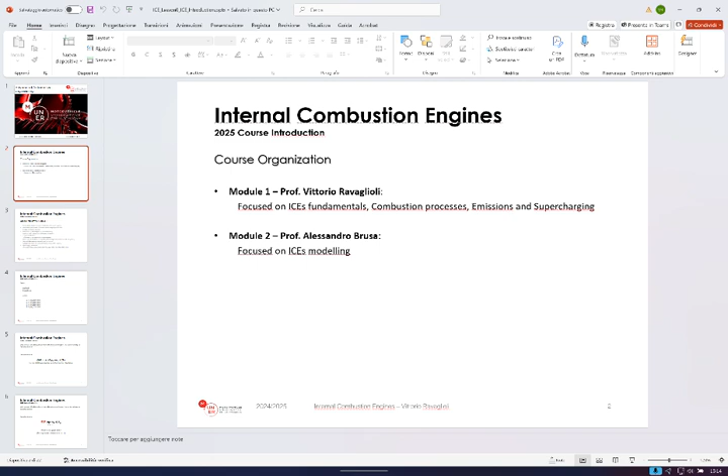of internal combustion engines. If I focus more the attention on module 1, the one we will discuss together, we can have a look at the contents.

As you can see, the content is probably... Sorry. Okay, don't know what's happening, but it doesn't matter.

The content is, let's say, wide. We will focus the attention at the very beginning on base contents.

Maybe for some of you, you will find something which is not brand new, and in some cases you will see that there are some recalls from previous studies you already had in courses you attended during the bachelor degree.

But the introduction is made to be sure that we are all on the very same page, and everyone is perfectly aligned, and we can start discussing more

advanced concepts. Then we will study spark ignited, compression ignited engines. We will study the emissions from engines. We will study abnormal combustions, and we will also, and I think it will be an important part of the

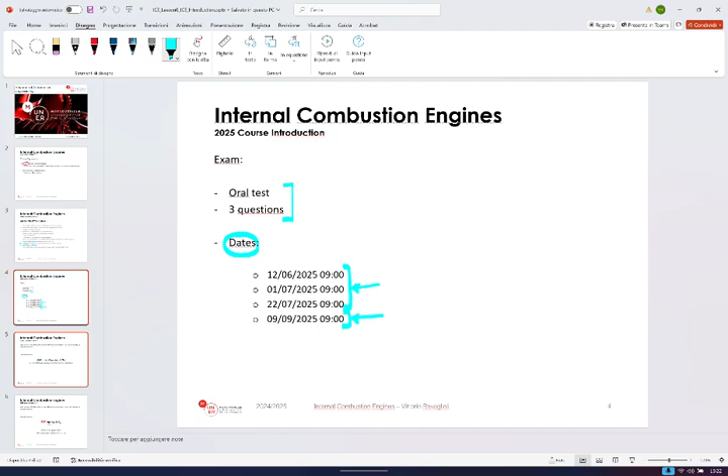You know that we are all focused in this period on decarbonization. So everybody is working to reduce the CO2 we have in the atmosphere, and if possible also to work on the pollutant emissions. We will see that emissions, pollutants, and CO2 are in some cases correlated, in some cases they are not at all. Okay, so we will see that carbon neutrality does not go always in the same direction in which emission limitations go.

But in the past few years, sometimes I had some students which were a bit skeptical at the beginning of the course. So they told me, we really don't know why we should still study engines, because they are a barely alive technology. So maybe we should focus the attention on something different.

And unfortunately today we are online, so it's slightly more difficult to discuss this. But in case you want to say something, I'm more than available for a quick discussion at the beginning of the course before starting this short introduction of the course. If you want to break the ice, we can talk together just a bit. Otherwise, no problem. Okay, no problem.

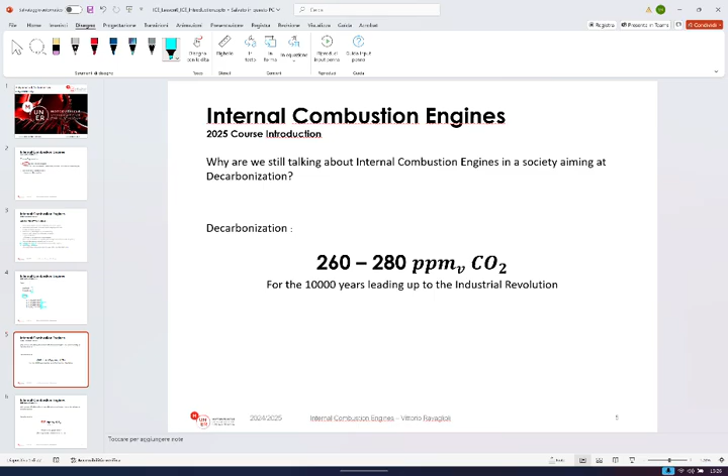So this is more or less the sense of this introduction we are going to start now. We are trying to put engines in the proper perspective that we will have to maintain during the course, to consider the alternatives we have and we will have in the medium and long term as power systems for the automotive field, but also for other power systems in general. Why did I tell you that it's very difficult not to consider sustainability as something which has a strong influence on the development of a technology?

Because this, the one you see here, was the concentration of CO2 we had in the atmosphere immediately before the Industrial Revolution. And according to the measurements we can perform now, it depends on the season, it depends on the place in which you perform the measurement in the atmosphere, but more or less this is the concentration of CO2. This number refers to 2023. As you can imagine, the number now is slightly higher than this one.

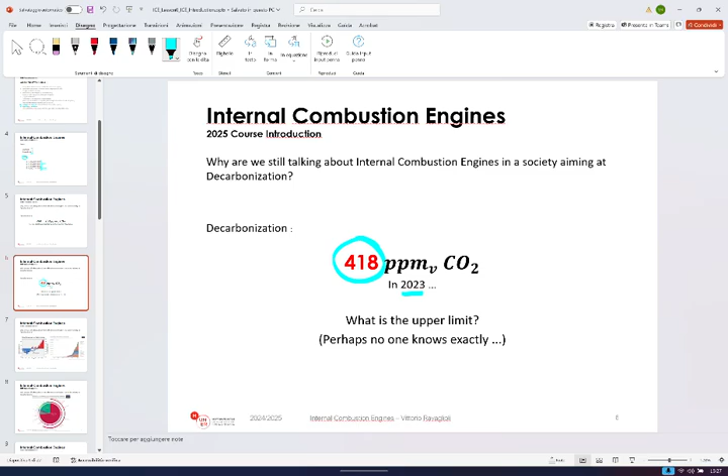Okay. We are seeing that this phenomenon is changing a lot the environment. It is affecting the climate. We see the consequences. We know that there will be effects in the long term, but nobody knows exactly where is the upper limit. Where should we stop this increase? Otherwise, the consequences are no longer manageable. Nobody really knows.

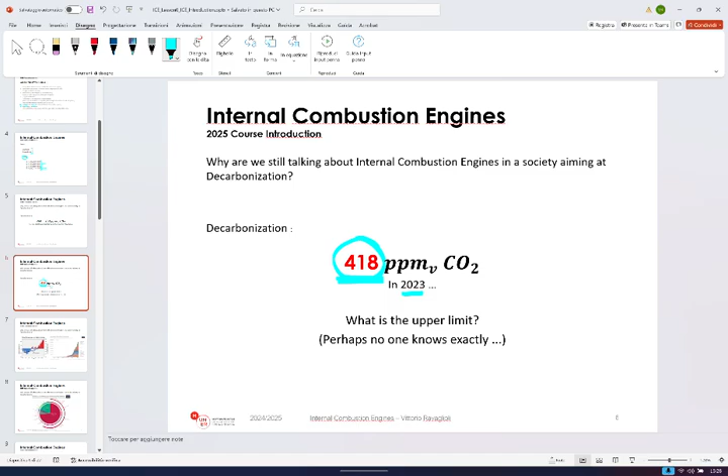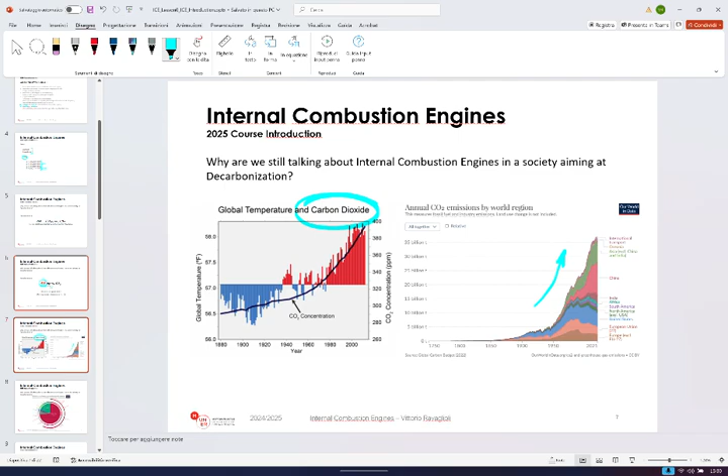Carbon dioxide is not the only reason why the global temperature is increasing. There are lots of greenhouse gases which are considered much less important than carbon dioxide because they are less present in the atmosphere. But the so-called global warming potential of other gases is much more dangerous than the global warming potential of carbon dioxide. We will see that other gases like methane, for example, or N2O are much more harmful compared to carbon dioxide for the global temperature.

What we see also, if we have a look at the right graph, is that some countries or groups of countries started reducing the CO2 production over the years. You can see it, for example, for the European Union, but still they are emitting a lot. Other countries, normally countries which are growing now or which are developing their economy now, are producing much more CO2, and the CO2, for example, produced by China is rocketing over the years.

As you can imagine, it's something that needs to be considered in a global strategy, because it's pretty obvious that we all share the same atmosphere. So the actions one country decides to put into practice need to be, if possible, and normally it's not so easy, coordinated with the actions which are put into practice by other important countries which produce a lot of CO2 as well.

I wanted to ask you a question, just to understand what's your level of knowledge about these topics, and maybe if you are interested and you already read something about these topics. We are in a course now which is focused on the automotive field. So when we speak about automotive, normally we refer to applications which are designed for transportation.

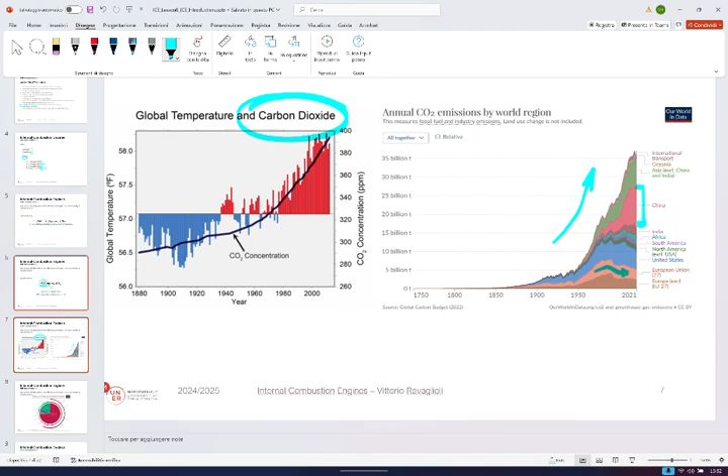So what I ask you is, here we speak about CO2. We normally hear that there is a lot of concern about the emissions from transportation, every day, more or less, but it probably depends on what you do in your life. But very often we hear experts saying that the solution to decarbonize mobility is this one. This is the holy grail which will make mobility carbon neutral. We heard a lot about, for example, how electric cars can save the world, how sustainable fuels can save the world, how hydrogen can save the world, making mobility carbon neutral.

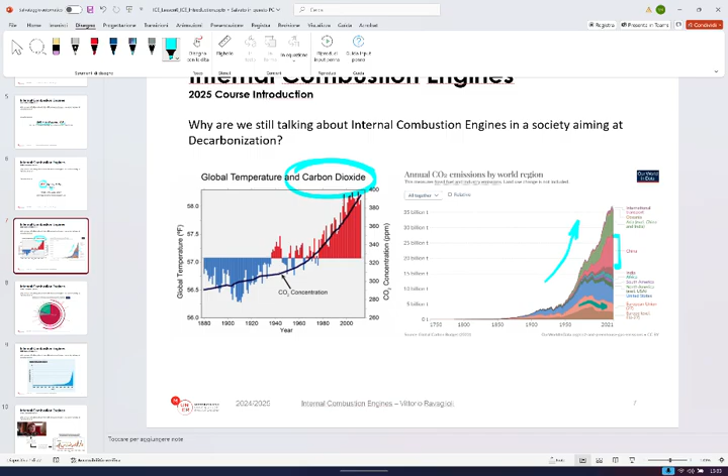It's too early now to judge how meaningful these assumptions are, but I wanted to ask you, there is a lot of concern on mobility, but do you have any idea about the amount of CO2 which is produced by mobility compared to the whole amount of CO2 produced by human activities all around the world? 20-25%. 20-25%, which is not far from reality. Which is a good number. This is not extremely up to date, it's from 2016, but as you can imagine, the picture nowadays is similar.

Here you see the impact in terms of CO2 produced by transportation. And here we put together road transportation, aviation, and shipping. These numbers are nowadays a bit different. For example, shipping is in percentage a bit higher, aviation as well. The total portion for transportation is a bit higher than 16.2%, but in general, I think that this picture clarifies that if we concentrate only on road transportation, aviation and shipping, and we forget about all the rest, for example, energy used in buildings, industry, and agriculture, we are in big trouble anyway.

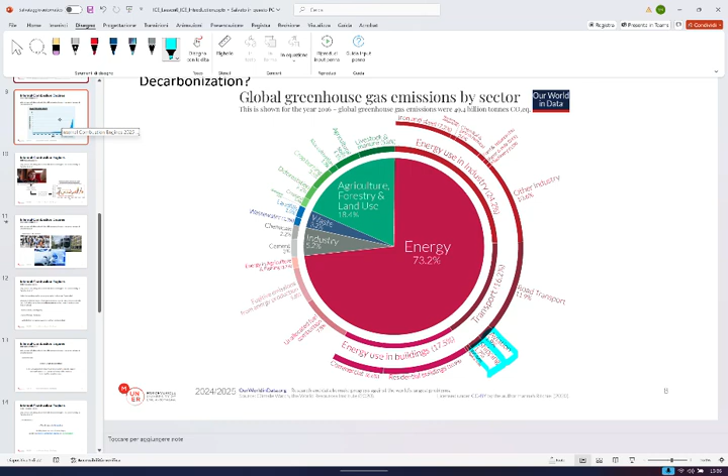The main reason why we continue to emit more and more CO2 is quite simple, and it is strongly related to the growth of population. Of course, this rapid growth of population from the Industrial Revolution means that the Industrial Revolution and the developments we had later on led to wealth, and this is something which, I think, is pretty clear and straightforward.

But this growth is becoming critical because we are changing the climate, and the climate is producing lots of heat waves worldwide, extreme weather phenomena. And what we see is that, in order to make it more practical, what's happening?

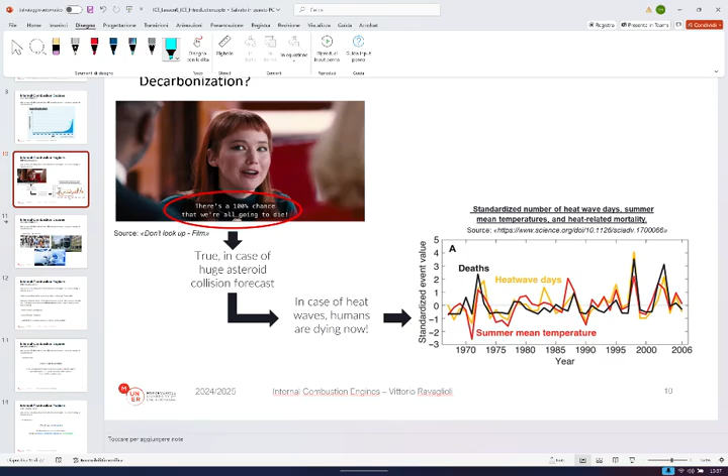Well, in the long term, sorry, in this slide I was a bit kidding. Probably you've seen the movie Don't Look Up. What's going to happen? Of course, in the long term, we are all going to die.

But what's happening now? Now what we see is that the heat waves we have over the years always correspond to a higher number of deaths, which are directly correlated. So if we do not take into consideration these phenomena, and we neglect the fact that we are experiencing extreme weather events and extremely high temperatures, these phenomena kill people.

So taking into consideration these problems and finding solutions in the long term which can mitigate these phenomena could be really beneficial for humanity. So in this sense, I think that we can, as engineers, feel the responsibility of doing something in this direction. The problem is that many times we say that we feel this responsibility, but many of us have different opinions about what proper solutions leading to beneficial results can be put into practice.

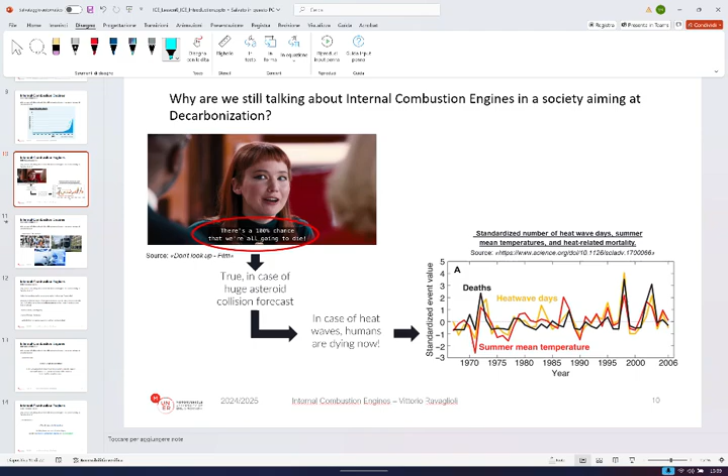Normally, when we speak about solutions, we hear people saying that we should all walk, we should use public transportation, or other people tend to say that using EVs can be the best way to mitigate the emissions, at least from mobility. Okay. I don't know what's your point of view. It's not necessary to discuss it now.

On these first two solutions, let's say 1, 2. No. The highlighter is not fantastic, so this is 1, this is 2, and this is 3. 1 and 2, I have nothing to say. They are really sustainable options. If we walk or if we share the transportation systems with other people, we can reduce a lot our impact related to mobility. With this, I would say that it depends. It can be more sustainable or not. We will have to discuss it later on.

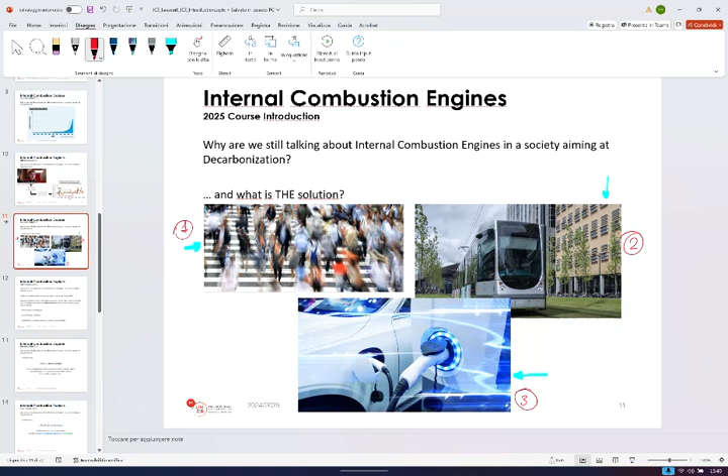But if we look at the technologies which are not related to walking or using public transportation, here I wanted to start introducing some major technologies we have for mobility. When we use a car, we are studying automotive engineering, so when we move a vehicle, we normally have 3 options in the short and long term. The option is to power the system with the internal combustion engine, or if we have an electric vehicle, we can use one electric motor, of course, plus the batteries, which store the energy, which are probably the most critical player in this framework. And then we have the so-called fuel cells.

In this case, the propulsion system is still an electric motor, but the energy is stored in a fuel, which in most of the cases is hydrogen, especially for the most conventional fuel cells which are produced now, which are the PEM fuel cells. And basically they feed an electric motor generating electricity, converting a fuel, as I said, normally hydrogen, into electricity. So these are the three options we have available for mobility in automotive vehicles.

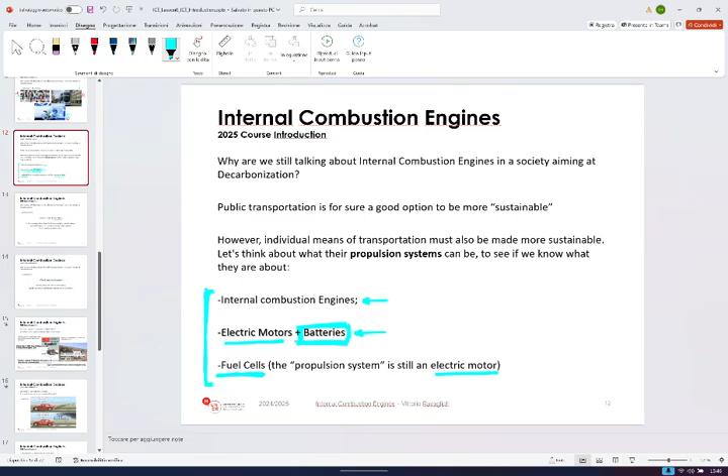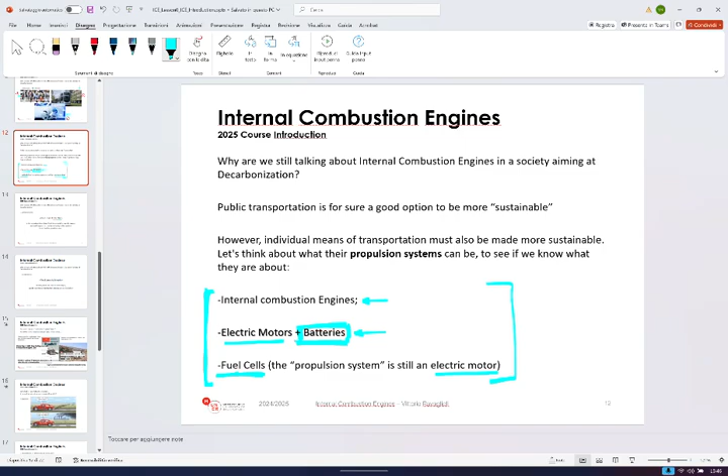In some cases, we tend to think that the future is fully electric, and some say that electric cars will be the future of mobility. I have to say that in the long term, it is difficult to see what's going to happen. We really don't know what's going to happen in the future, because the technologies we were mentioning before, these three, are developing a lot, and they are becoming more and more efficient over the years. So maybe the comparisons we are performing now will lead to completely different conclusions in, I don't know, 20, 30 years. But at the moment, the short-term future struggles to be fully electric for several reasons.

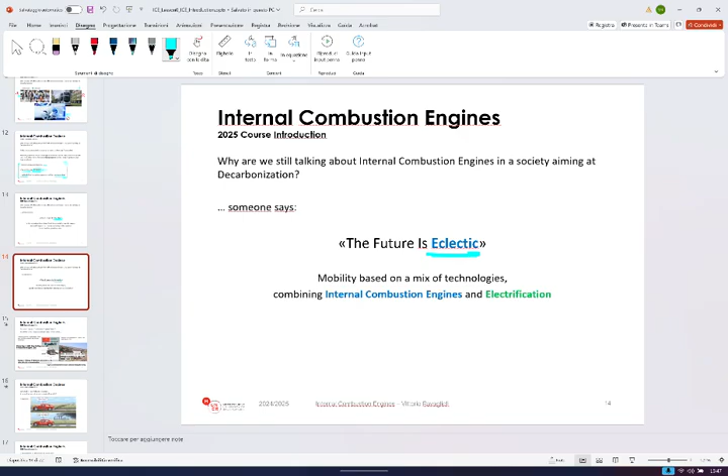So some experts in this field are starting to say that probably the future will be eclectic, not electric. Eclectic in the sense that mobility will be probably based on a mix of technologies, which will combine in the vehicles of the future internal combustion engines and electrification.

Unfortunately, again, I cannot see your faces today. Maybe some of you are skeptical, but again, we will see it. I'm going to conclude this introduction with some examples.

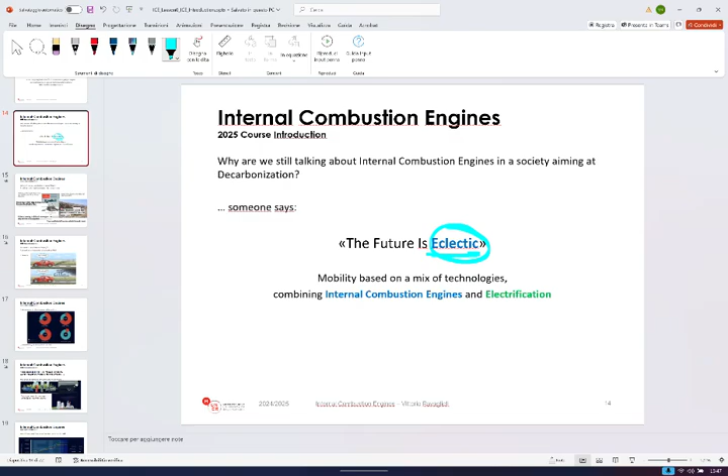And we also know that in 2035, theoretically, it will be no longer possible to produce cars which are equipped with internal combustion engines fed with fossil fuels in the European Union. We will see what's going to happen. But the point is, engines are still here, and there are some technical reasons we will see during the course, and which I think, when we will do some energy balances, will convince us. And these technical reasons are not related to conspiracy or any other theory which some people tend to use or mention sometimes.

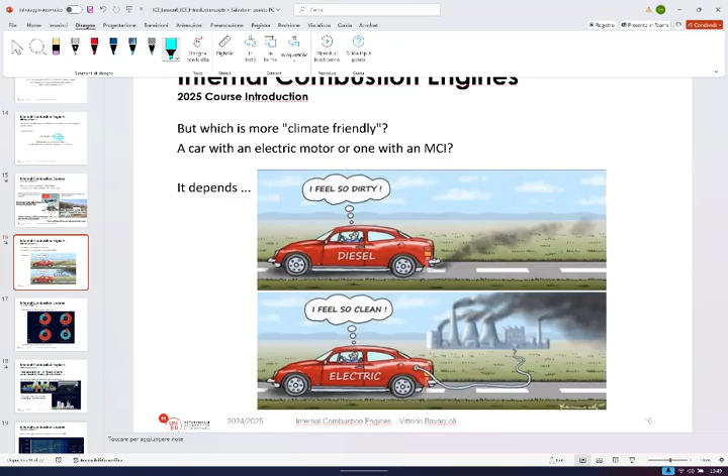So who's more climate friendly? A car with an electric motor or one with an internal combustion engine? Again, it depends. Of course, this picture might look a bit stupid, but it's a joke, which basically wants to focus attention on the fact that diesel cars, for example, are considered evil at the moment for several reasons. Some of these reasons are perfectly meaningful. For example, the Dieselgate is one of the reasons which shed a lot of bad light on internal combustion engines. And of course, these cars are considered high polluting cars.

Normally, we consider electric cars extremely clean. So we consider EVs, electric vehicles, as totally clean because they do not produce any pollutant from the tailpipe. What's the problem? The problem is that the real impact of electric cars depends on the way in which we produce the energy which is introduced in the car. And for this reason, I read a book by an engineer who was asking, you know what EV means? It's electric vehicle.

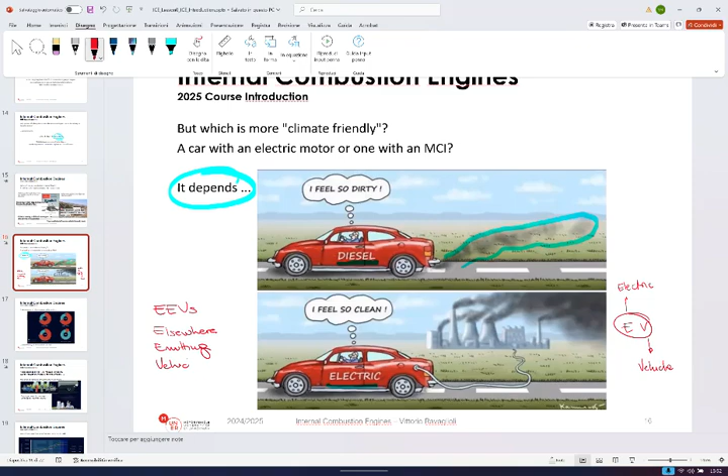I read a book about an engineer who tended to name EVs as EEVs, which in his perspective was the acronym of Elsewhere Emitting Vehicles. Because honestly, they really produce emissions normally, but they produce emissions somewhere else compared to where they are used.

Of course, it is pretty obvious, the amount of emissions they produce depends on the way in which the electric energy is produced. If the energy is produced using renewable sources, of course the impact of these technologies is very low. If the energy is produced from burning fossil fuels, as you can imagine, the impact becomes extremely high, because even though they are normally efficient, the process which is behind the production of electricity is not that efficient. So overall their impact increases a lot, but it depends on the energy grid in which these vehicles are charged.

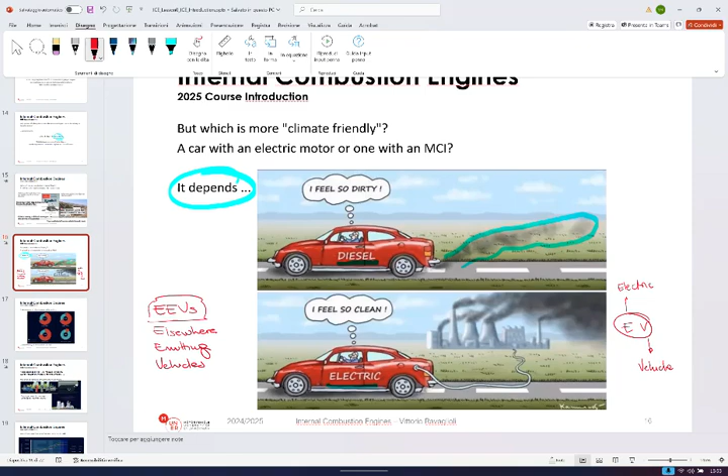Of course, it depends also on the country. Here are some examples. It depends on the season of the year. Probably you know that in Italy, at least during the summer, 60 point something percent of the electricity we produce during the summer is renewable, and of course during the winter it is much lower. So the season of the year in which we use each specific technology is very important to quantify the real impact of that technology.

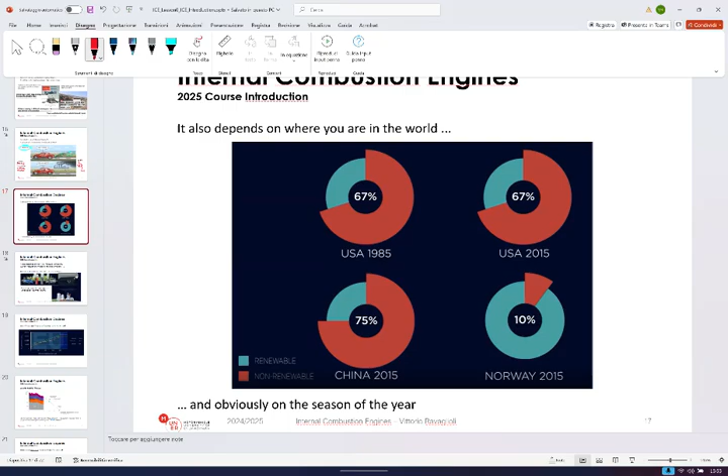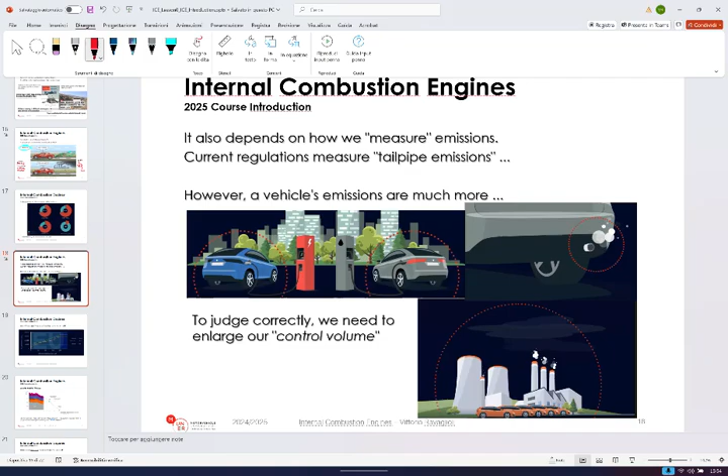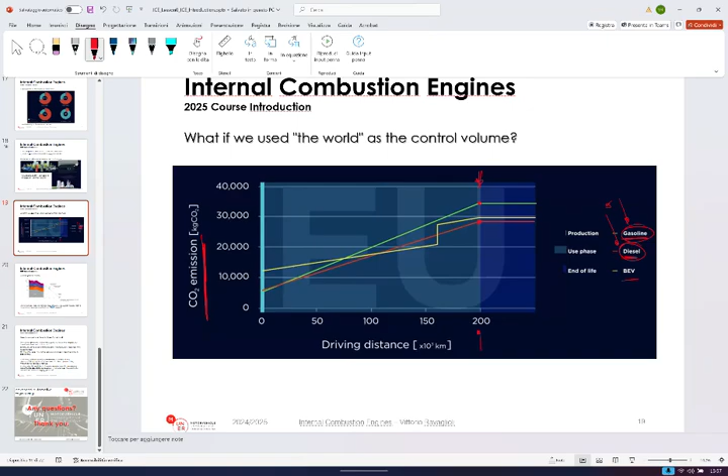When we move from spark ignited to compression ignited engines, we gain efficiency, so we reduce CO2 emissions. But what was extremely surprising for me at the very beginning when I read this paper is that electric vehicles started their life with an amount of CO2 associated with the vehicle itself which was much higher compared to the starting point of cars equipped with internal combustion engines. The main reason why this line was starting at this point was simply one thing: the battery.

Producing a battery for a battery electric vehicle is extremely energy consuming. So the extra CO2 associated with the production of the vehicle is similar to the emission increase you have in a diesel vehicle after running the car for approximately 50,000 kilometers, which was at the beginning for me quite surprising. Then you start from this point, and if you consider the average energy grid we have in Europe, you see that the rate of increase of this line is actually lower. So if you recharge the vehicle, you produce less emissions, but the main weakness is the production of the battery.

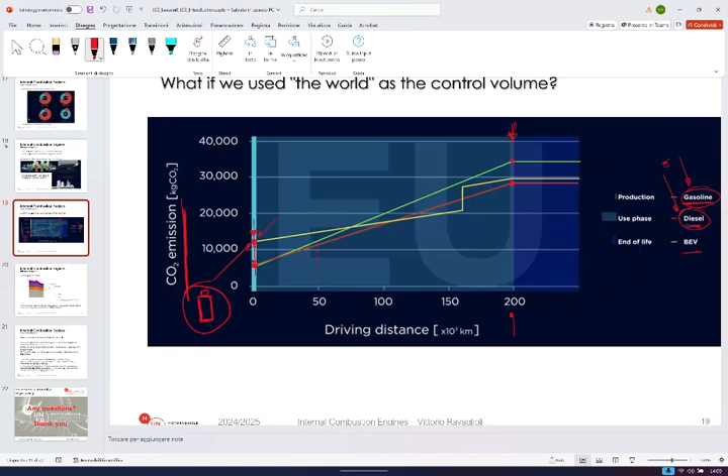Anyway, we have some alternatives, we have some technologies available, we are developing these technologies, and we have some goals. Which goals do we have? Probably most of you are aware.

Sorry, just for curiosity. Yes. The step that was in the... Sorry, I have the audio coming from two sources. Okay, repeat please. Sorry, that was my mistake.

In the previous slide, we had a step after, I think, 150. This one. I think this no longer exists, because in this case the battery was replaced with another battery, because as you can see, this extra increase is the same you have here, and the reason was that after 150,000 kilometers or slightly more, the capacity of the battery was low enough to require replacing the battery.

Now I have to say that battery technologies have improved a lot, and normally in a battery electric vehicle the battery is guaranteed for approximately roughly 190,000 kilometers, which means that after 190,000 kilometers the battery capacity is higher than 70% of the initial battery capacity. So probably this number should be here, this replacement should be here instead of here, but the physical meaning of this step is the one I was mentioning before. I don't know if I answered.

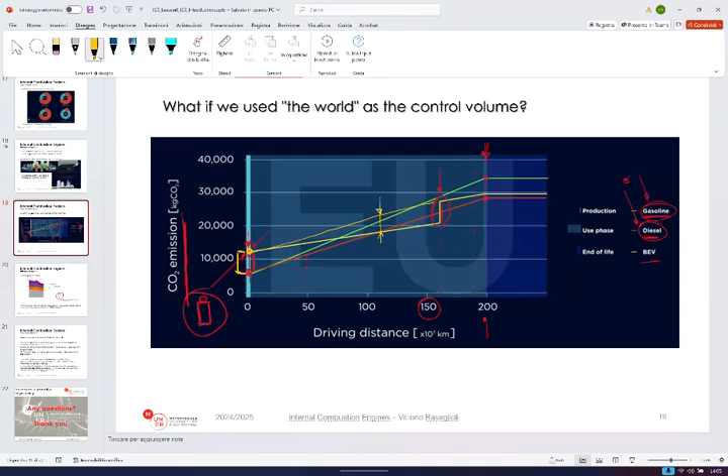With regard to the automotive field and transportation, probably you know that we have to be carbon neutral from 2035 onward, which means that in the European Union, according to current regulations, in 2035 only carbon neutral vehicles will be sold.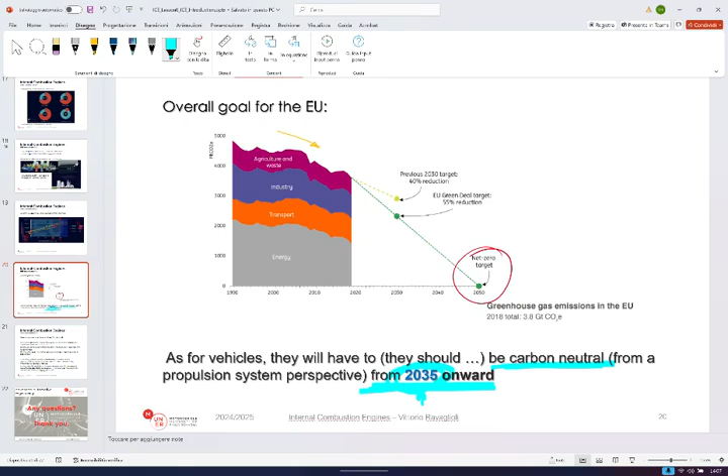Of course, non-carbon neutral vehicles will still be used because they will already be on the market, but from 2035 only carbon neutral vehicles will be produced, which means a carbon neutral vehicle is a vehicle which does not produce any CO2 emission when it is used.

So it means that if you burn a fossil fuel, you burn a hydrocarbon. Again, we will see it, but probably you know that current vehicles burn hydrocarbons. When you have this molecule of a hydrocarbon, you have carbon and hydrogen. When you burn this, of course, you produce CO2 and water. We will see the reactions, no problem.

But now it's just to focus attention on this: when you burn a hydrocarbon, of course, you produce CO2. If the hydrocarbon comes from a fossil source, nature took millions of years to produce it, and now we burn it and produce a lot of CO2 in the atmosphere. So this process cannot be sustainable. We increase the CO2 concentration in the atmosphere, so according to current regulations, from 2035 onward these vehicles will no longer be acceptable. So which alternatives do we have?

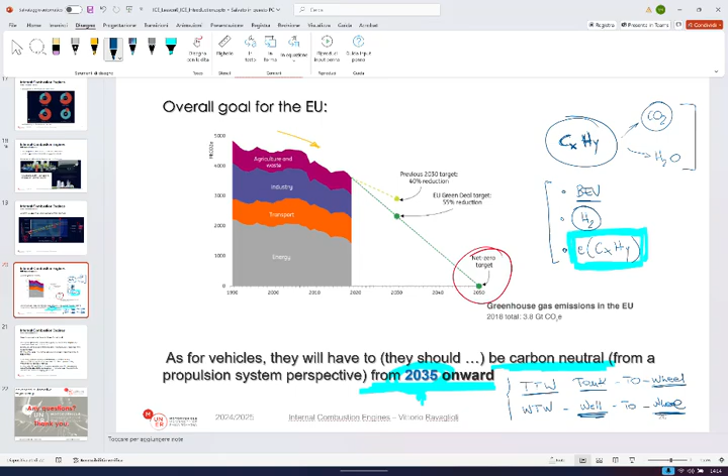Fair emission regulations should be the so-called well-to-wheel — so from where we take the energy to where we use the energy. Now lots of regulations are under development, but at the moment we are stuck in an intermediate situation. But the question was super correct, because the last thing I wanted to analyze with you is this consideration.

How do we measure the emissions of a vehicle? This is a key problem related to the question I just received. The obvious place to look is the tailpipe, and when I say obvious, I mean that current emission regulations look at the tailpipe. But there's much more to it than that.

Before you drive a car, it must be built, and to build it, resources must be extracted. On the other side, which is an even more complicated aspect, what happens when the vehicle reaches its end of life? I mentioned before that it's very difficult to go backwards and, for example, quantify the CO2 emissions associated with the production of batteries.

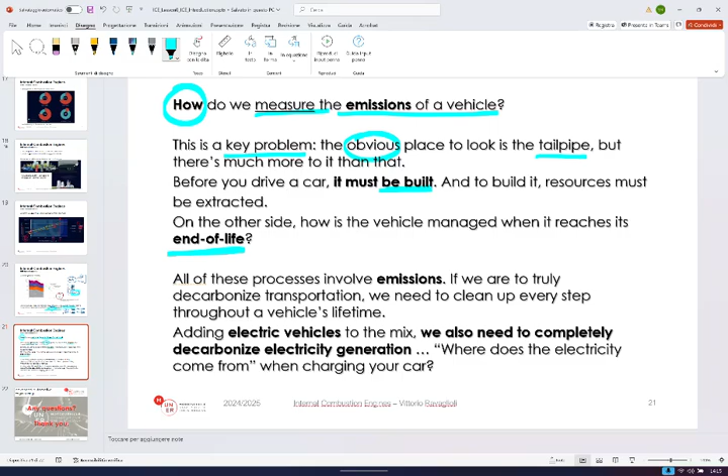But quantifying the emissions associated with recycling old batteries is even more complicated, because now we are at a stage where we are using electric vehicles produced in the past few years, but we are not yet completely aware of how we will be able to manage all these batteries when they reach their end of life.

So adding electric vehicles to the mix, which is a reasonably recent problem, we also need to completely decarbonize electricity generation.

So if we want to properly quantify the emissions, and we really want to decarbonize transportation, which is the goal we really have — because it is necessary due to several reasons we see every day in how air quality and climate are changing — we really have to do it with a fair approach, which does not favor one specific technology over another. I'm not in favor of one compared to the other, but I think that as engineers we really have to be fair in these considerations.

So when we look at conventional engines, we have to say, okay, it's rubbish because in most cases it uses fuels which come from fossil sources, and they have a reasonably low efficiency.

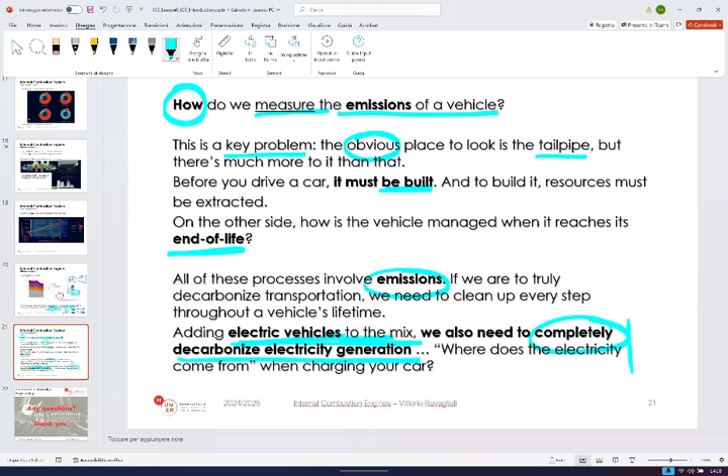Okay, this was just an introduction, and I really wanted to do it together to start collecting some useful consideration information, which are, in my opinion, necessary to look at engines in a different way. We will sometimes recall this consideration, and also we will go more into the details during the course.

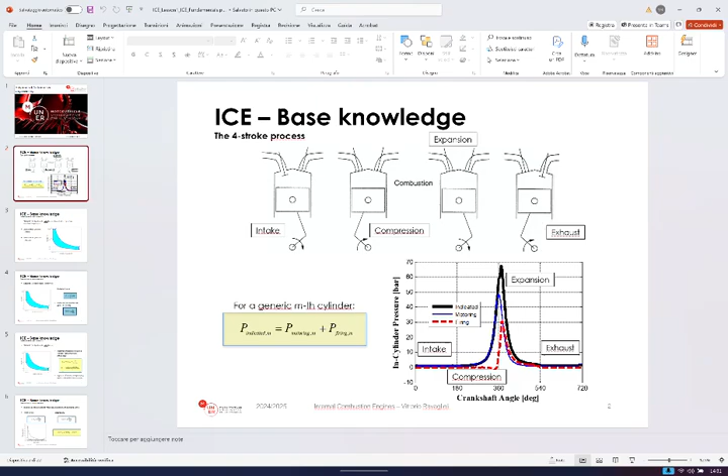Okay, let's start from the very basic concepts of internal combustion engines. During the course, we will study internal combustion engines which are characterized by the presence or implementation of the so-called four-stroke process. So we will have engines which are, in most cases, characterized by a cycle that can be divided into 4 consecutive strokes.

Again, probably some of these concepts are very well known to you, but in case you have any doubt, please stop me and feel free to ask.

The first stroke is the intake stroke, where we introduce the air inside the cylinder. As you can see here, there is an intake valve which is open, and in this stroke the fresh air enters the cylinder. The piston moves from the top to the bottom dead center, rotating the crank slider mechanism around the crankshaft.

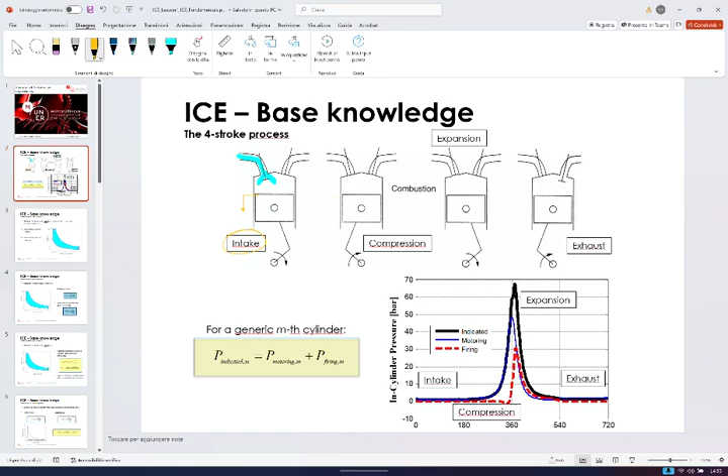Then the piston reaches the bottom dead center, and during the compression stroke the piston goes up and moves from the bottom to the top dead center. As a result of this movement, in the first stroke, which goes from approximately 0 to 180 degrees, the pressure inside the cylinder remains low, close to atmospheric pressure.

The valve is open. Then, approximately at 180 degrees, you close the intake valve, and with the valves closed, you move the piston up and increase the pressure inside the cylinder. So the piston approaches the top dead center, and at a point close to the top dead center, you have the so-called start of combustion.

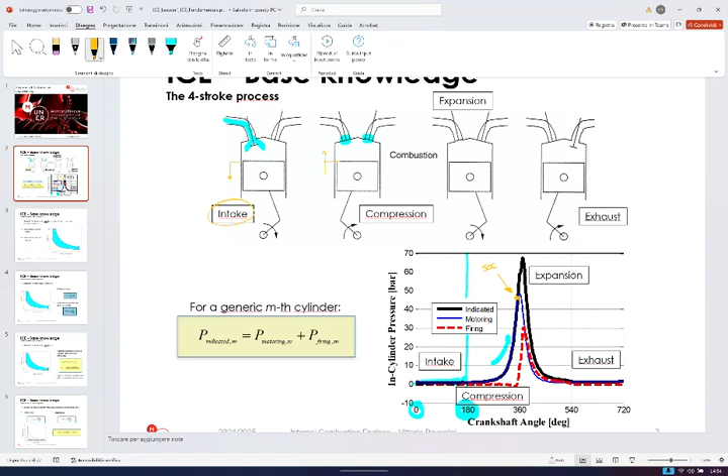So if the charge within the cylinder did not burn, or if it were not ignited, we would have in the cylinder the blue trace pressure. So we would have the intake, compression and expansion, and in this case the engine would behave more or less as a volumetric pump.

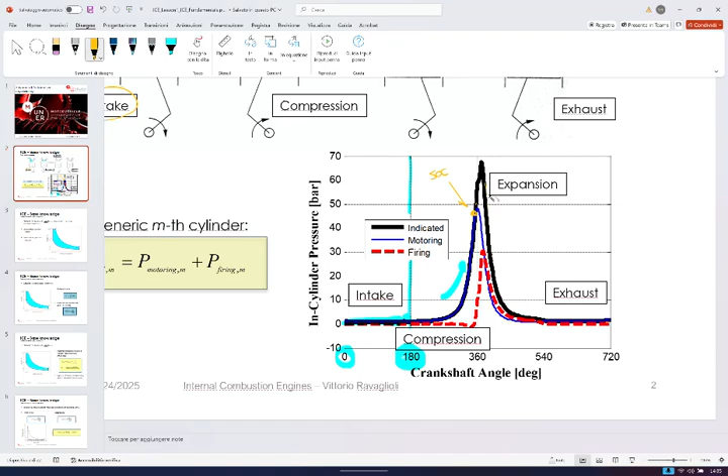Here what you see is that in the real world we have an extra pressure increase, the red trace added to the blue one, which leads to the instantaneous pressure within the cylinder, because the compression-expansion blue trace is increased by the fact that within the cylinder we have a charge which also contains a fuel that is ignited, and the extra pressure generated pushes the piston down from the top dead center to the bottom dead center.

During this stroke, we really collect energy, work. Then when we approach the bottom dead center, we open the exhaust valve, and then the exhaust gases leave the cylinder and go to the exhaust line and leave the engine.

Of course, they do not immediately leave the engine because, as you know, there are some post-processing tools, like for example the after-treatment systems, which have to process the exhaust gases in order to minimize the emissions released into the atmosphere.

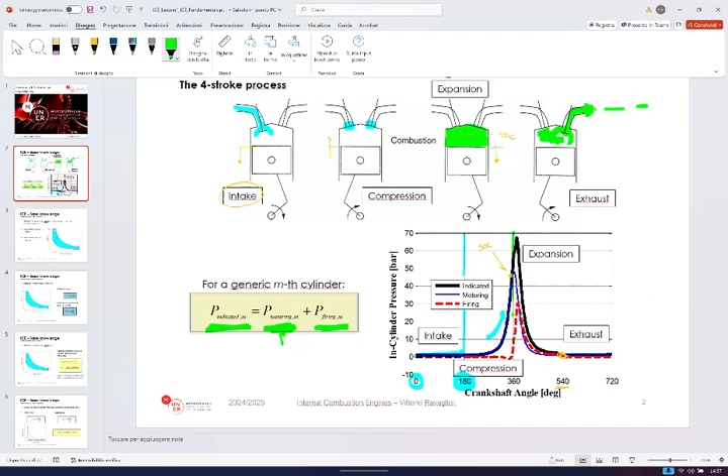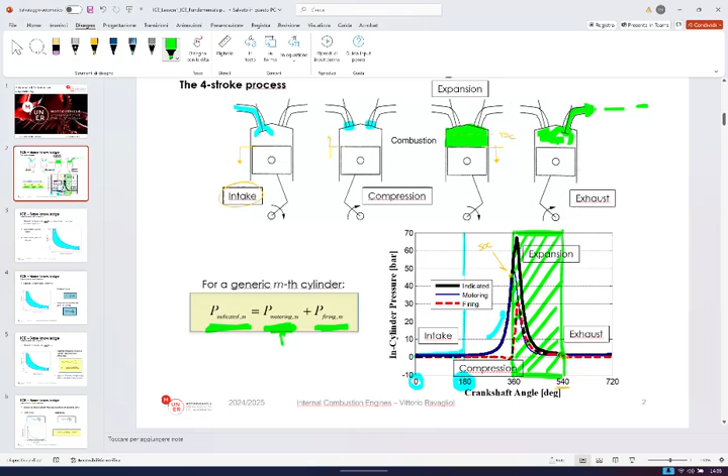So to see it in another way, we have 4 strokes, but the only one in which we really collect power is this one. Or at least the only one in which we collect a significant amount of power. So this is the process. How do we study the process from a thermodynamic point of view?

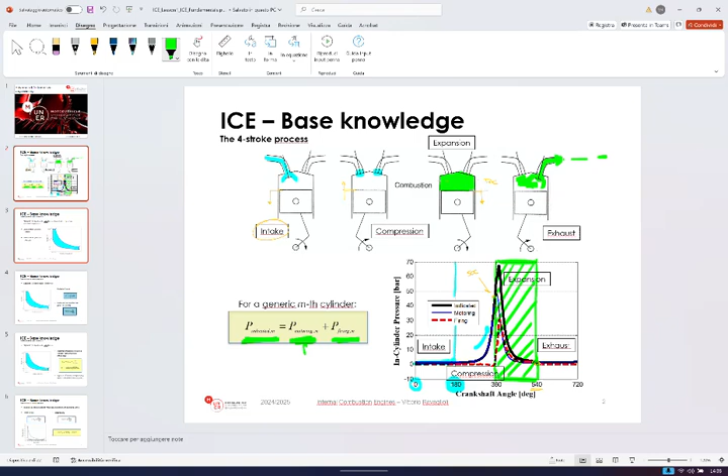Well, we have different ways. The most typical and easy way is to use an ideal cycle or start from an ideal cycle. Normally the Sabathé cycle is the most common way we have to study the efficiency of an internal combustion engine, and it is an ideal cycle which combines two simpler ideal cycles, which are the Otto cycle and the diesel cycle.

The Otto cycle is an ideal cycle in which we have one ideal compression which goes from 1 to 2, and then we have an ideal combustion. I don't remember what I said. The Otto cycle, let's start from this. We have this ideal compression, and then we have a combustion which takes place at constant volume.

While the diesel cycle is similar, but the combustion process takes place at constant pressure. Then in both cases we have an ideal expansion, which is the one that in this case goes from 4 to 5. The Sabathé cycle puts together the characteristics of these two ideal cycles.

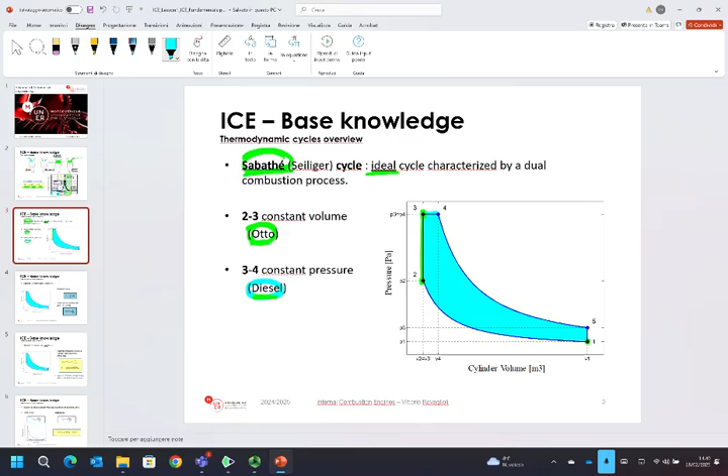Okay, just to clarify it a bit better, let's have a look at this. We said we have ideal cycles, okay? So let's try to prepare or to create together the indicator diagram of one of these two ideal cycles. The indicator diagram is the diagram in which we have pressure and volume, or pressure as a function of the volume.

All the engines we described before are characterized by a minimum and a maximum volume, where the minimum volume is the volume of the combustion chamber, VCC. We can name it in different ways, but the minimum volume we have in the cylinder when the piston is at the top dead center. Okay? So when the piston is up, at the top dead center, we have a certain minimum volume, which is the volume of the combustion chamber, and which of course cannot be set to 0.

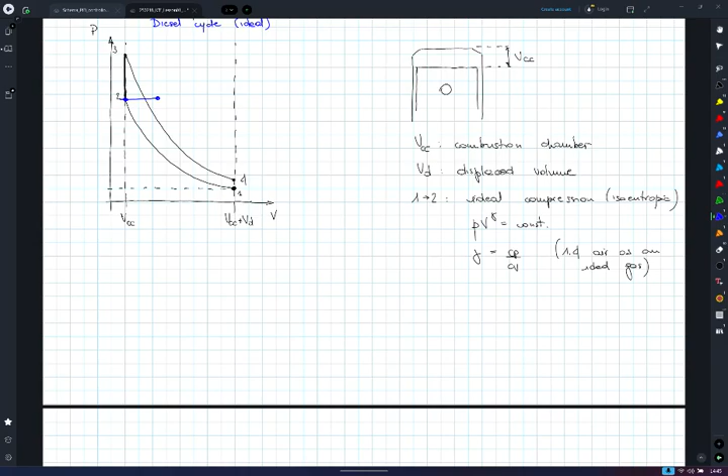Okay, I think it's pretty simple, and it was pretty clear for you all. If we consider the diesel cycle, it is always an ideal cycle, but the way in which we introduce heat is different. We introduce heat at constant pressure, and then we have again an ideal isentropic expansion. This is how we introduce heat. Again, the Sabathé cycle puts together these two cycles. Okay.

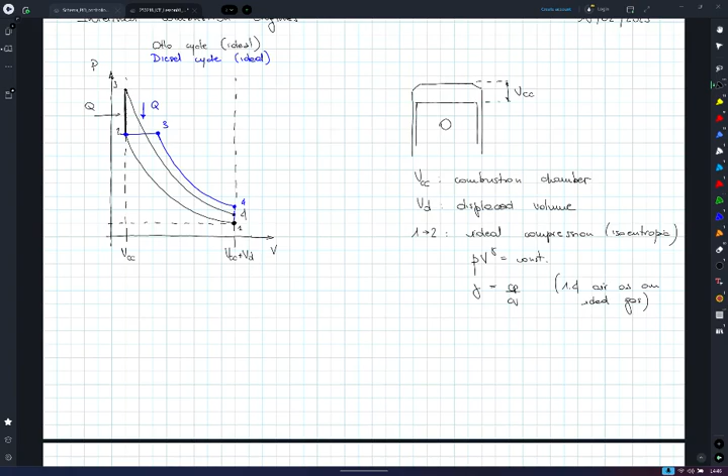So let's go back very quickly to our slides. We can start introducing some, again, quantities you probably already know, you already heard in the past. You already studied in other courses, but it's very important to be sure that you all have clear these quantities, because these quantities are the ones which are really correlated with the performance of the engine.

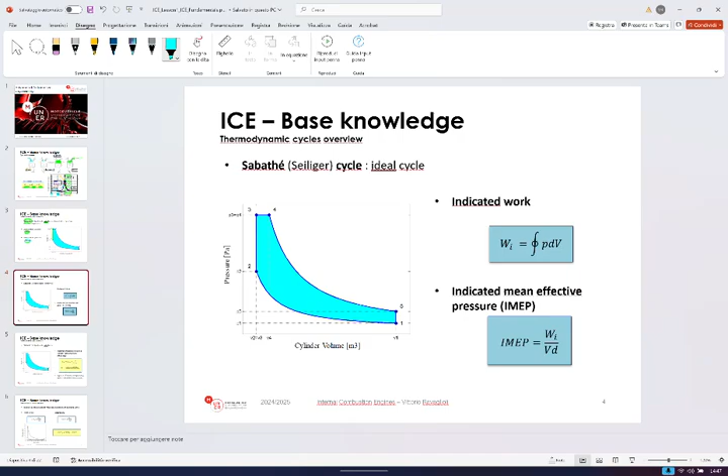What do I mean when I say that they are related to the performance of the engine? I mean that if you will in the future develop an engine in your activity, or you will assess the performance of an engine, or you will study how efficient it is, or you will do anything which is related to engines in motorsport or in other more conventional industries or applications, you will have to analyze the amount of work which is produced by the engine,

and in most of the cases you will refer to the indicated work produced by the engine, which is the integral of the product P times dV, where P is the in-cylinder pressure and V the volume of the cylinder, so the product between the pressure and the variation of the volume, and the indicated mean effective pressure. Again, they are both indicated because they both depend on the in-cylinder pressure. Everything which is related to the measurement of the in-cylinder pressure is an indicated quantity.

The indicated mean effective pressure is the so-called IMEP, and it is the ratio between the indicated work and the displaced volume of the engine. The ratio between the two in terms of dimensions is a pressure, which is the reason why this quantity is named indicated mean effective pressure. It's a sort of work normalized with respect to the engine size, so normalized with respect to the engine displacement.

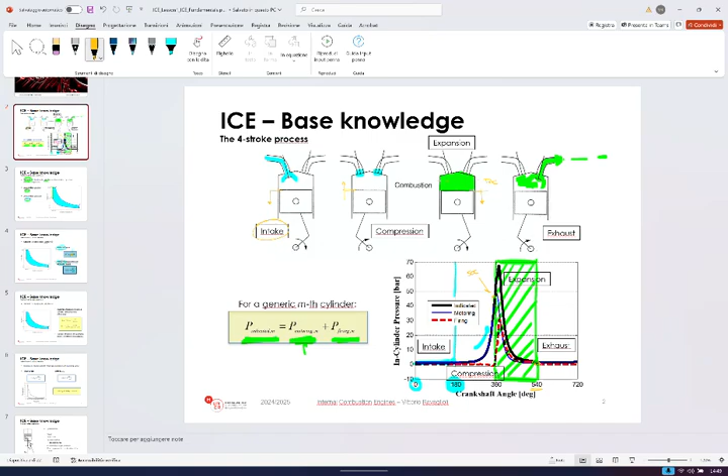Could you explain again what indicated stands for? Indicated is just a name which is used every time we are mentioning a performance parameter which is related to the measurement of the in-cylinder pressure signal. If you look at this indicated work, it depends on the in-cylinder pressure, represented here in black. If you measure the pressure, you can calculate this quantity. And we will see that there is the indicated work, and the so-called indicated torque. We will calculate it, not today, but maybe next time.

And these quantities are extremely important, because when we develop an engine and we try to maximize its performance, normally we test solutions which impact the combustion process, and we analyze the impact of each technical solution on the combustion process, measuring in a test cell the in-cylinder pressure signal. If you measure it, you are able to quantify the effect on the combustion process of each modification you put into practice. And if you calculate this integral, the indicated work, you immediately see that it corresponds to the area included in this indicator diagram.

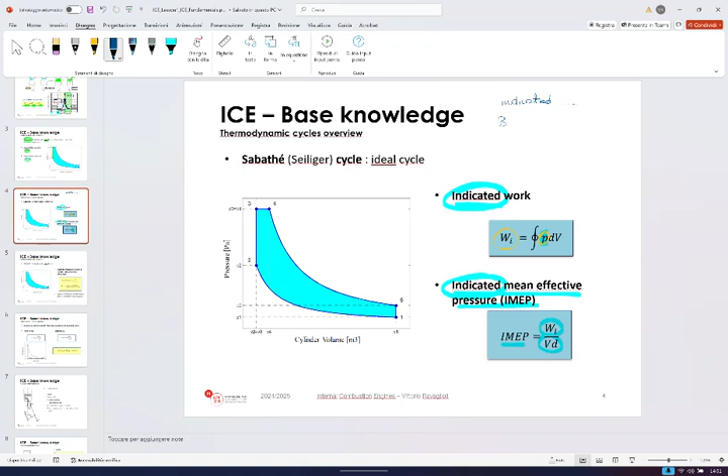There is normally a distinction in engines between indicated quantities and brake quantities. So for example, we have indicated torque and we have the brake torque. Why? Because the indicated torque is the torque calculated from the in-cylinder pressure, so it depends on the combustion process. The brake torque is the torque which is measured, available at the crankshaft of the engine. So in the middle between indicated torque and brake torque, there are other losses, for example the friction losses and the pumping losses you have in an engine.

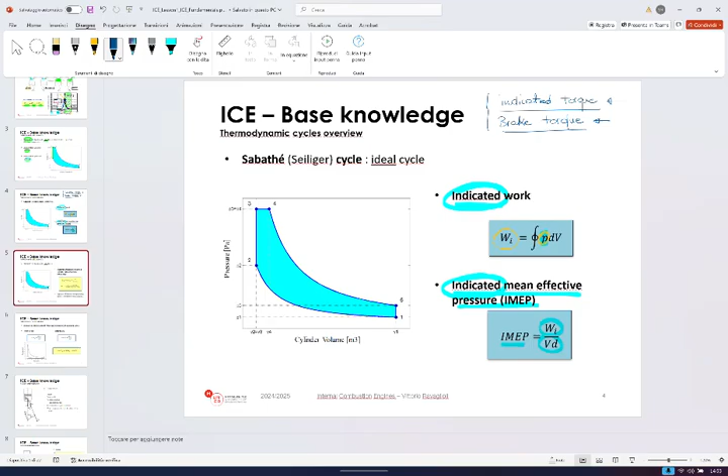So if you want to analyze the impact of a modification on, for example, the spark plug you use, maybe you will see an impact on the combustion process and on the indicated quantities. If you test, for example, a different lubricant or oil for the engine, you change the frictions, so maybe the indicated quantities remain identical, but you increase the brake torque because you reduce the frictions. I don't know if I answered your question. Yes, thank you.

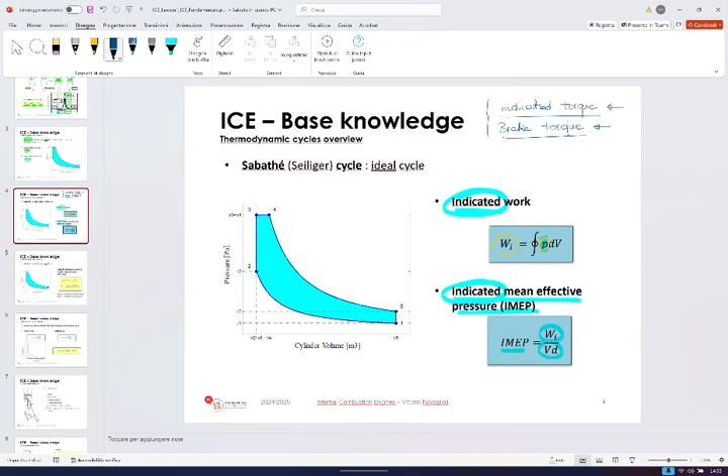So these are two key parameters. Then another aspect which is normally largely studied in your base courses, but based on my experience not everybody did it, so it's worth spending some time remarking its importance, is the so-called thermal efficiency. The thermal efficiency is the work we get, the indicated work in this case, from a propulsion system divided by the energy available for the system. So we divide the work by the energy budget we provide, which is the mass of fuel times QLHV, the lower heating value.

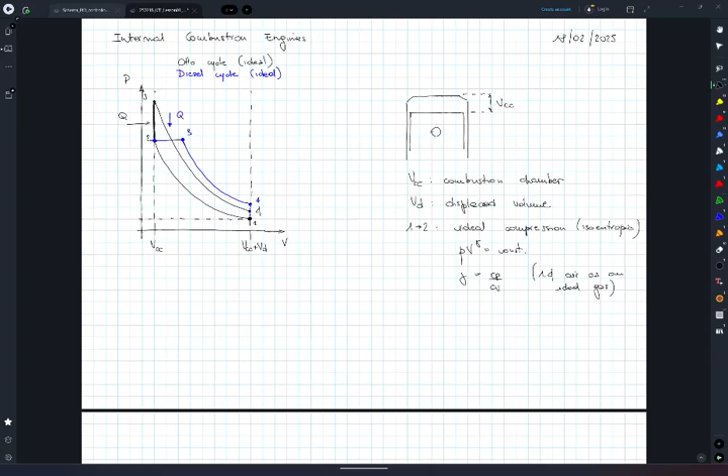The lower heating value, LHV, is a characteristic of the fuel. It's measured in megajoules per kilogram, so it's the amount of energy contained in 1 kilogram of fuel. Do you know roughly what's the lower heating value of a conventional fuel used in an internal combustion engine, for example gasoline or diesel? 48 megajoules per kilogram. Yeah, 48 is quite a lot, but 43 is more common. 43 megajoules per kilogram corresponds to gasoline or diesel.

And if we look at this number, I don't know if you have an idea, but 43 megajoules per kilogram is a lot of energy in 1 kilogram. And here we see one of the major issues related to the use of battery electric vehicles. The problem is that it's extremely difficult to have all this energy in this weight.

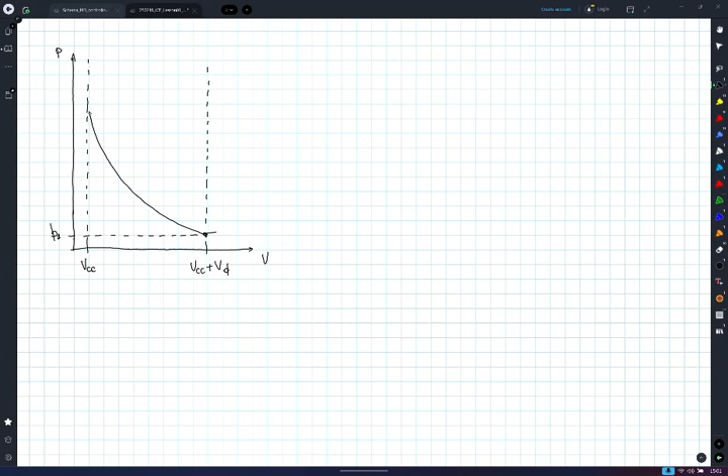So if we draw again the indicator diagram of the Sabathé cycle, minimum volume, maximum volume. This is the pressure. And we say that here we have the intake pressure P1. We have an ideal compression. The combustion process is partially at constant volume and partially at constant pressure.

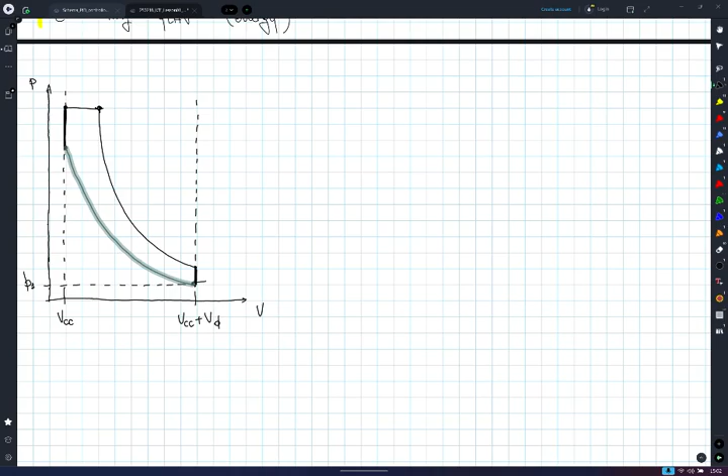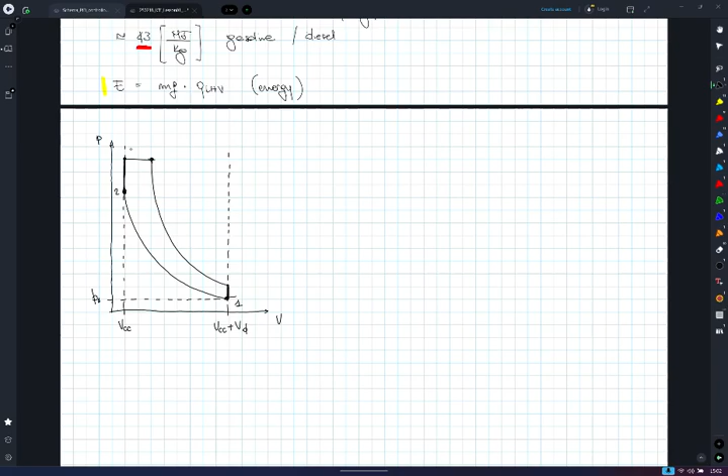This is 1, 2, 3, 3 prime, and 4. So we introduce heat here, and we introduce heat here. We can name it Q1, which is split into these two portions. And here we discharge heat, Q2.

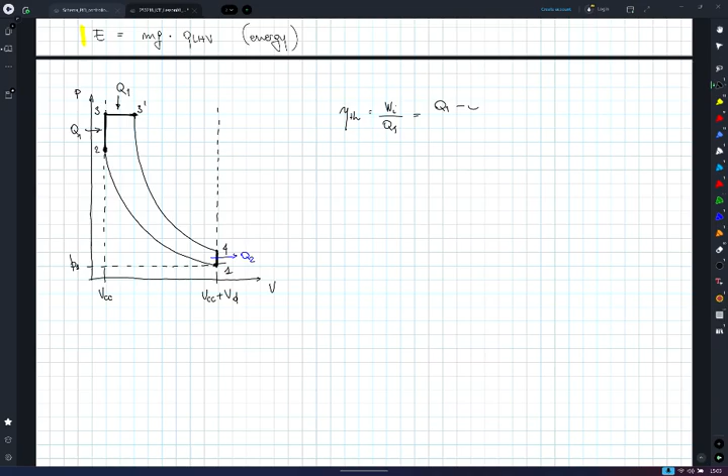So the thermal efficiency of the cycle, as you studied in previous courses, is the work divided by the total heat we make available for the energy system. And it is therefore equal to Q1 introduced minus the discharged heat Q2 divided by Q1, which is obviously 1 minus Q2 divided by Q1. Okay, easy peasy.

So since part of the heat is introduced at constant volume and part at constant pressure, you will have that Q2, which is at constant volume, is CV times T4 minus T1. This is Q2, divided by CV times T3 minus T2 plus, sorry, my bad, CP times T3 prime minus T3. Okay.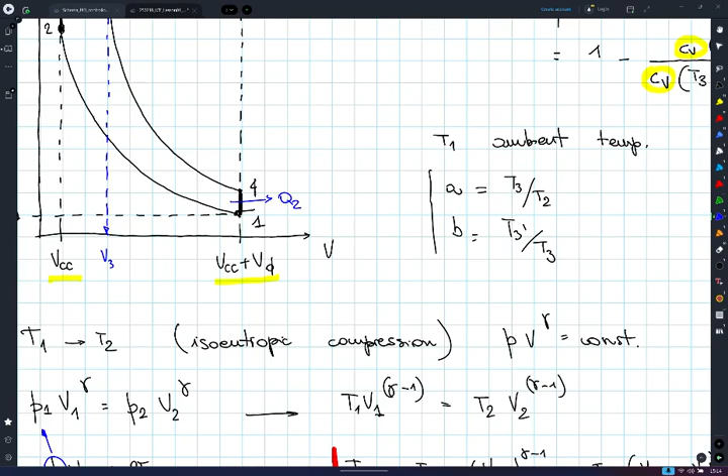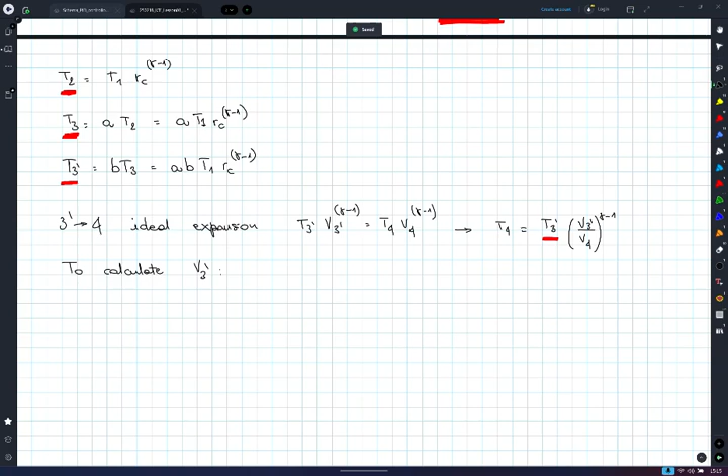So we need to calculate V3 prime. To calculate V3 prime, what can we do? We can have a look at where it is, and we can notice that it is exactly at the same pressure as V3.

Okay, so if we consider the fact that P3 is equal to P3 prime, so the pressure is constant, we can consider that since P equals mRT divided by V, P equals mRT divided by V will be constant from 3 to 3 prime.

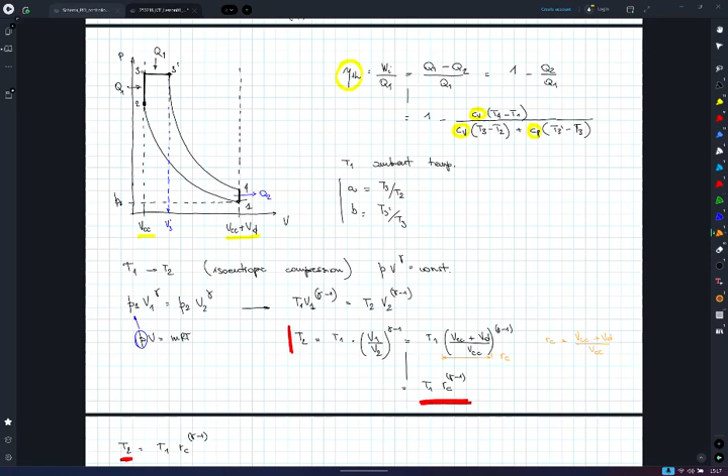So this equation, P3 equal to P3 prime, can be written as mR times T3 divided by V3 equal to mR times T3 prime divided by V3 prime. Which means this mass can be neglected, this can be simplified, because R is the constant of the gas and m is the mass of fluid trapped in the cylinder, which is always the same between 3 and 3 prime, because the valves are closed.

So what we can do is write that T3 divided by V3 will be equal to T3 prime divided by V3 prime, and we can say that V3 prime will be equal to T3 prime divided by T3, times V3. But we know what this ratio is, because this ratio is B. We defined it before. We know V3 because V3 is the volume of the combustion chamber, so this volume becomes equal to B times VCC. So V3 prime is something we know.

Or better, we didn't know it, but we calculated it. Okay, so if we go back and take this result and put it here, we can determine also T4.

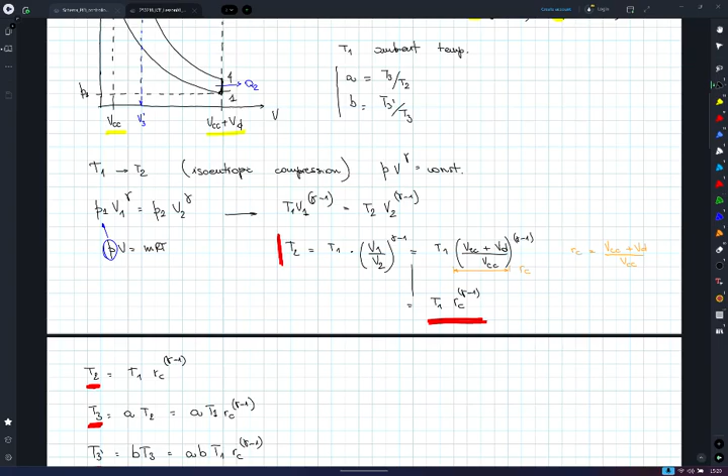So based on this, we are able to put the temperatures in this initial equation of the thermal efficiency, and we can calculate it as

thermal efficiency equal to 1 minus CV times, it was, remember it, T4 minus T1. So T4 is here, so it is AB at gamma T1 minus T1, divided by

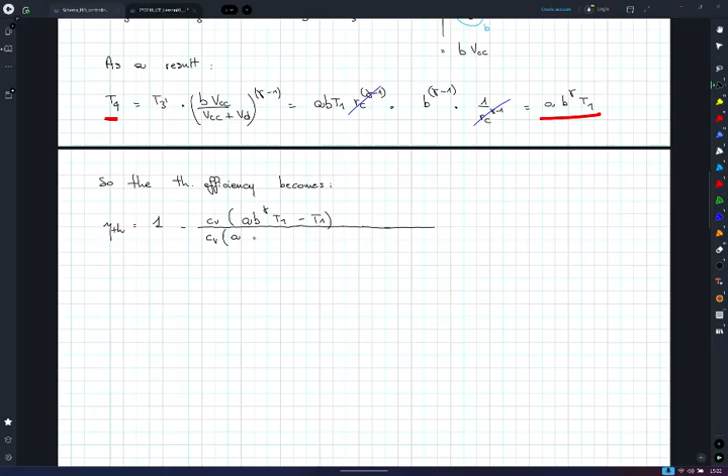CV times, it was T3 minus T2 here, so it will be A T1 times the compression ratio at gamma minus 1

minus T1 times RC at gamma minus 1, plus CP times, it was T3 prime minus T3, so it is ABT1 times the compression ratio at gamma minus 1 minus T3, which is A T1 times the compression ratio at gamma minus 1.

So here something can be easily simplified, because you see that T1, T1, T1, T1, T1, and T1 can be simplified. So what we have here is a simplified equation like this.

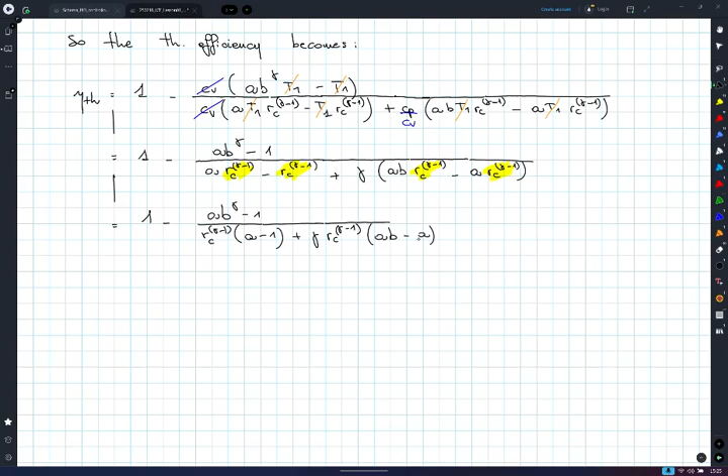RC at gamma minus 1 times A minus 1 plus gamma RC at gamma minus 1 times AB minus A. Okay, and this is the

thermal efficiency of the ideal Sabathé cycle. Okay? And if you compare this with the expression that you had here in the slides, you see that the result you get is the same. You just have to collect this ratio, the compression ratio at gamma minus 1.

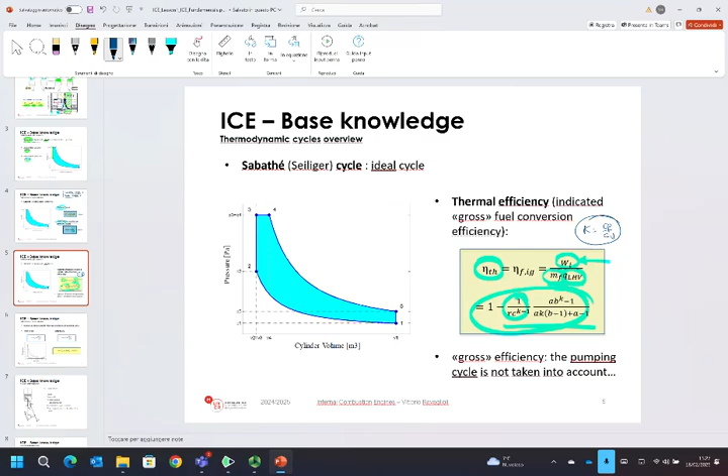Of course, here in the slides, K is Cp divided by Cv, so it's the specific heat ratio. I named it gamma in the notes, but it's exactly the same.

If we take this expression and you set A, which is again T3 divided by T2, equal to 1, you obtain the ideal diesel cycle.

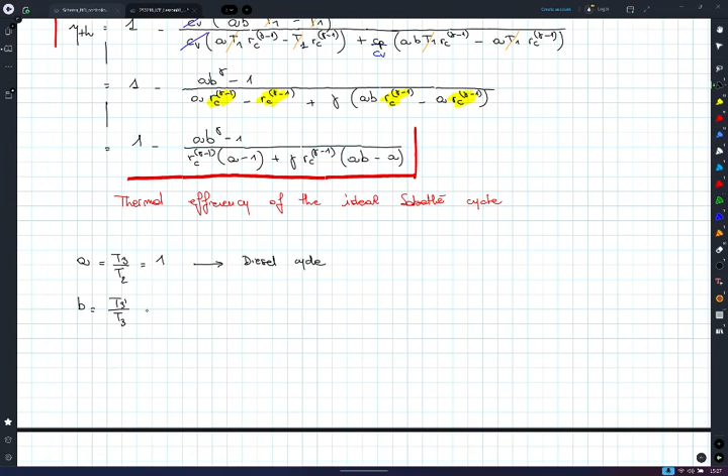If you set instead B, which is T3 first divided by T3, equal to 1, you obtain the Otto cycle. Because in one case you set 3 first equal to 3, and in the other case you set 3 equal to 2.

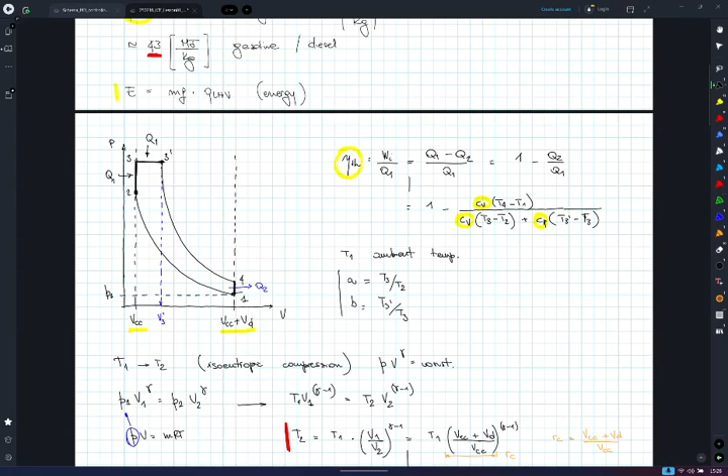So if you set A to 1, so 3 equal to 2, you have the diesel cycle, and if you set 3 first equal to 3, you have the Otto cycle.

Okay, and this is, I'm sure, a result many of you already know, but it's something we will start from next time to do some important considerations about the design parameters which affect significantly engine efficiency during its operation.

And we will start to, based on this, highlight some of the major weaknesses of conventional internal combustion engines which limit their use as sustainable, efficient power systems, both with sustainable and not sustainable fuels, which we know as fossil fuels. We haven't spoken yet about sustainable fuels, but we will do it later on.

But the point is that now we are highlighting technological weaknesses of internal combustion engines which are related to this thermal efficiency, and we will do it next time, because today our time is over as far as I see.